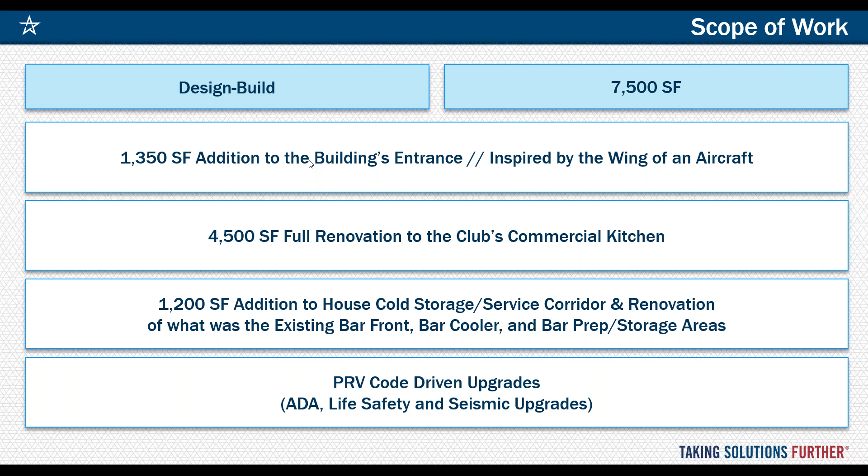updates to the facility, and some of those code requirements were ADA or ABA, and then life safety, which comprised of fire protection systems. That was an all new fire protection system, and then replace in kind with all new updated fire alarm systems, and then also seismic upgrades. So being that this is in San Diego, we obviously have some seismic concerns and had to upgrade those. So we can go on to the next slide here.

All right. So real quick, the overall floor plan, as you see in the top center, there's the shaded area, which is the existing areas that were to remain essentially as not part of the original scope of work. To the far right on the plan is the bar that we also had to renovate as part of the scope, where we had the beer cooler and those things added. To the bottom left is where the new entrance corridor, pre-function corridor, added to the exterior of the building. And to the left of that, off this graphic, is where the main parking area is for the existing site. And then in the bottom center is the large 4,500 square foot kitchen area.

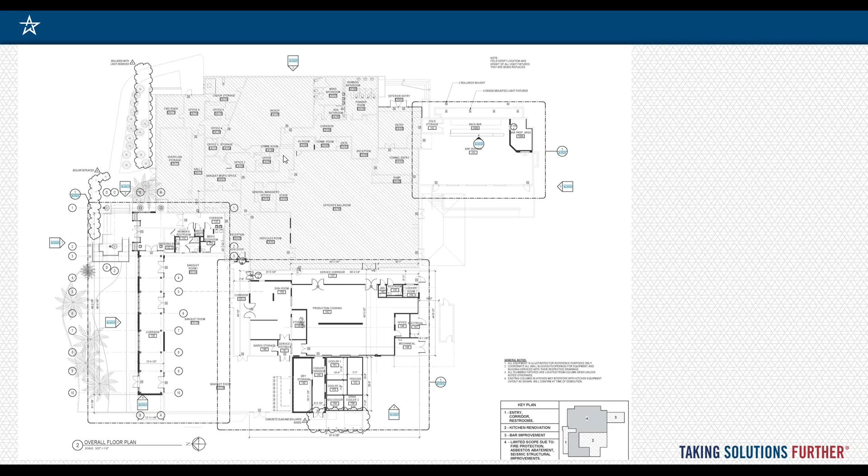What's important in the plan is, in order to accomplish the expansions or additions to the facility, as part of that analysis, we had to look at the allowable areas within the unsprinklered components. And over time, there had been fire party walls that separated the kitchen area from the large banquet halls, but those walls had been compromised over time. And we had two options. One was to essentially redo and create a compartmentalization in plan to avoid major sprinkler upgrades, or the second was to do a whole sprinkler upgrade to bring the facility into current compliance, and that was the decision that was made. Okay, next slide.

All right, so speaking of the PRV, the plant replacement value code-driven updates, I spoke on the seismic and just kind of wanted to go into a little bit of depth of what that entailed. So we knew going in that we were going to have to do all this, and we actually partnered up with a local seismic engineer who worked directly underneath the engineer of record. Again, Stellar's a design build firm, so, having had this project in San Diego, we sometimes will obtain consultant services through local entities to perform scopes of this nature.

So as far as the seismic upgrades, there were strategic areas throughout the facility that were deemed necessary to saw cut and remove slabs. You can see on the right, that's an interior corridor where we removed the slabs, excavated down, and then there was specific details where we would add additional rebar reinforcement doweled into the existing foundation. And in essence, what you're doing is you're widening the foundation and ultimately resisting, I guess, turnover could be the term we use here. But so it was that, and then also the exterior where we had to excavate down and do the same thing, just widen the girth of the foundations there. So next slide, please.

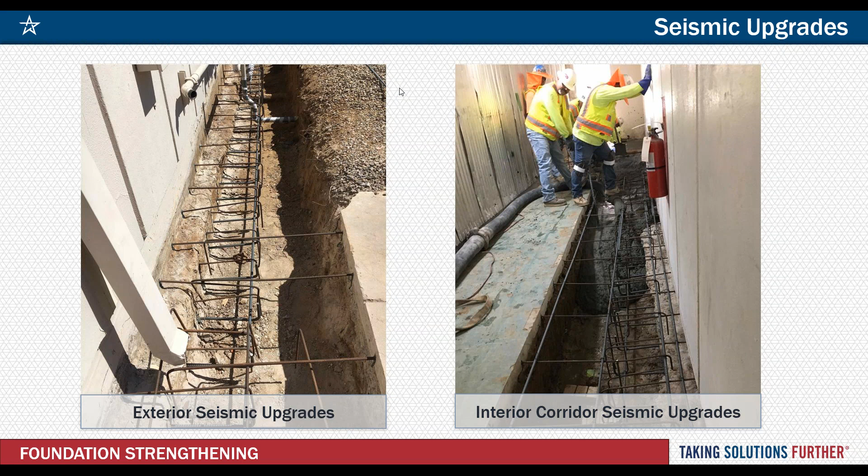Okay, so we had foundation strengthening. We also had shear panel reinforcement. So again, in strategic areas around the building, we had to demo out, and you'll see the picture on the left where we're demoing out the existing plaster. And then we went back with 1/2-inch CDX plywood, which spanned the entire face of different areas. And then subsequently we went back and put new stucco over the exterior facade. So next slide.

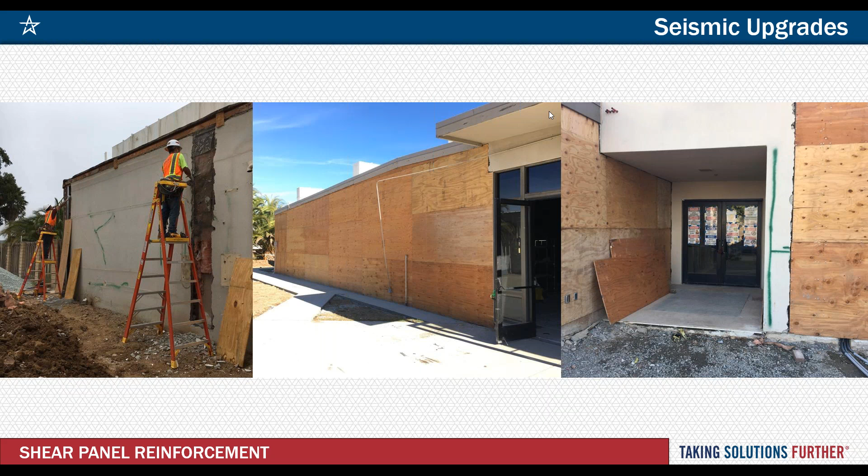So just more pictures of the same and just kind of the process. You can see the layout there where we're getting ready to stucco. And this is Tony. On the far left picture, you see columns placed in front of the wood paneling. The wood paneling is the existing exterior. You see the dark areas. Those were the entrances from the outside into the ballroom spaces.

They have one large room area which could be subdivided into 3 rooms, and so that's why there are the number of entrances. And part of the scope, once again, was to create an interior corridor so they could access those rooms not from outside under weather concerns, but from an interior connection point. And you see the columns had to be built independent from the existing structure to avoid any of the structural issues. That's the expansion area. Correct. Yeah. Okay, next slide.

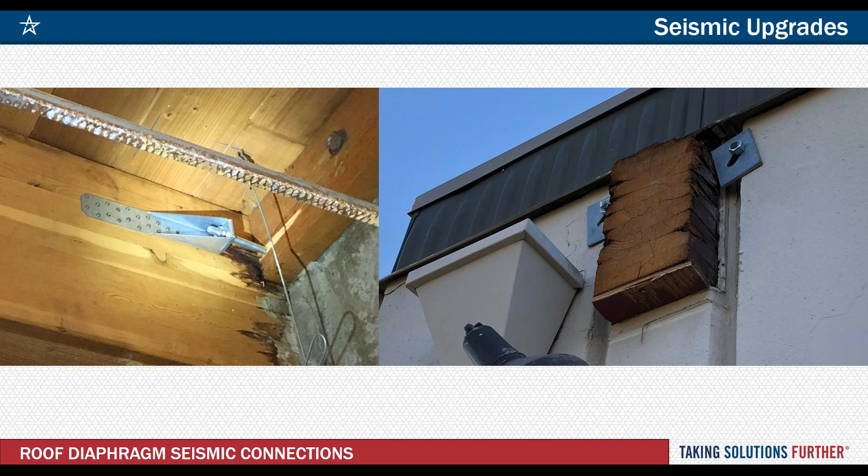Okay, so we talked about the foundation strengthening. We talked about the shear panel wall reinforcement. So then there were also concerns of the roof diaphragm and the necessary reinforcement there. And so what you're looking at here is there are structural wood beams all around the perimeter of the facility, where the ends of the beams protrude through the exterior wall. And so that occurred all around the perimeter of the facility.

So one of the details was to drill and attach anchors and hold downs through the wall into the existing beams. And so the intent was to secure those in place in the event of a seismic event or earthquake, to prevent those beams from shaking off the top of that wall. And then subsequently you'll see some pictures as well, but we had an architectural cap that covered the ends of these beams as well as the washers you see there. So next slide.

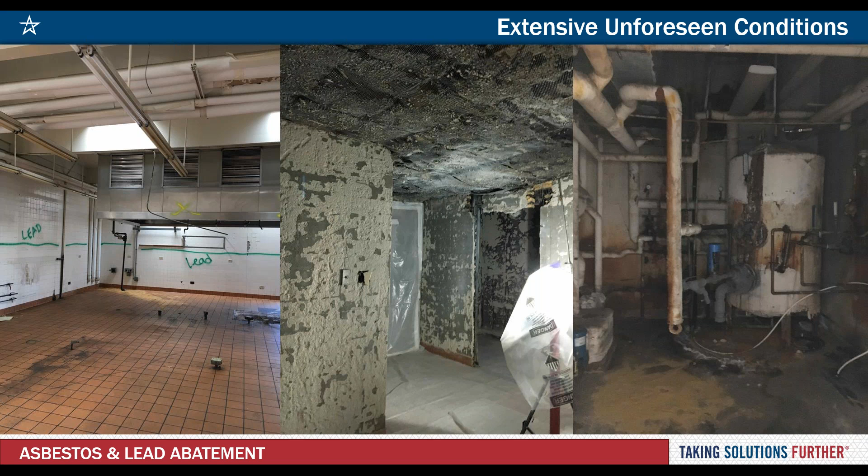Okay, so going into this project, we knew that there were hazardous materials. The facility was constructed, like they said, back in the late 50s. And so we had onboarded an asbestos survey consultant and had them go out and they identified all the different materials that were considered hot. So we had asbestos, there was lead, we found some areas with some mold, and so through the natural course of abatement, we prepped all the areas and abated everything so we could go back with the new materials.

So what you see on the left, that's the kitchen space. And you see all the walls are lead. The picture in the middle is just some of the corridors leading up to the kitchen. And then the far right picture is like something you see out of a horror movie. It's the boiler room, and of course all the insulation and everything leading up to it had hazardous materials. And I guess this is a result of a building that's 60 years old that had a number of renovations and additions that weren't very well documented. Correct, yeah. So there were some obvious challenges that came from that, and we'll cover some of those in additional unforeseen conditions. So, all right, next slide, please.

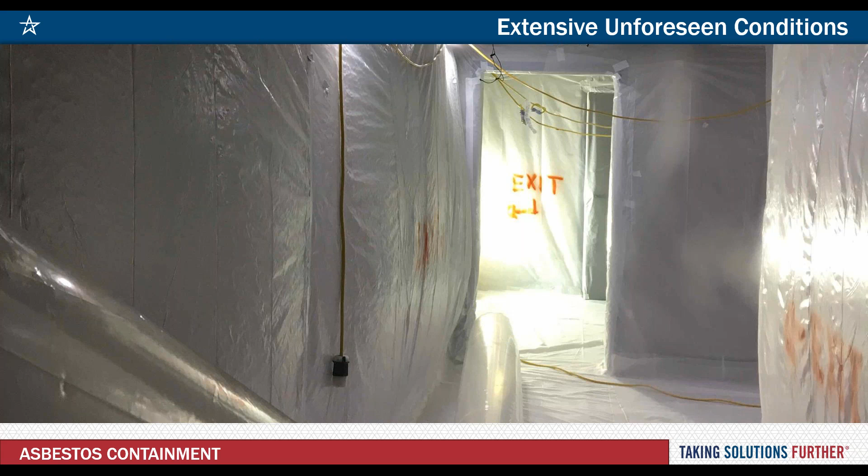So yeah, just some additional pictures of the abatement process. Of course, everything's plasticed off, and we have air scrubbers and just the natural process of abatement. So it was all, I guess, what was the word I was looking for? Sorry. But yeah, that's the process. We can move on to the next slide.

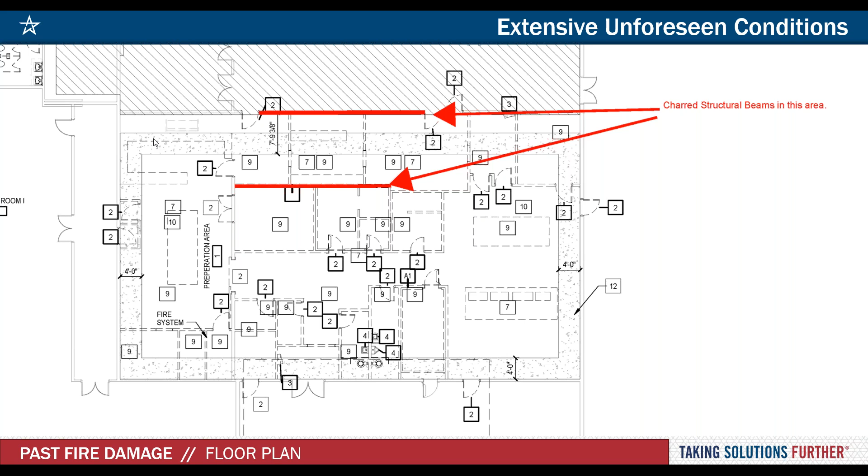And then you see a whole other entire main that would be running out towards the north of the facility. And I'll show you a civil plan so it makes a little more sense where it was going. And we were going to put a new grease interceptor there. You can go to the next slide. And again, this is the original design. So this is the floor plan you just saw. Again, the mains going out to the existing grease interceptor, and then also the new one on the left. Okay, next slide.

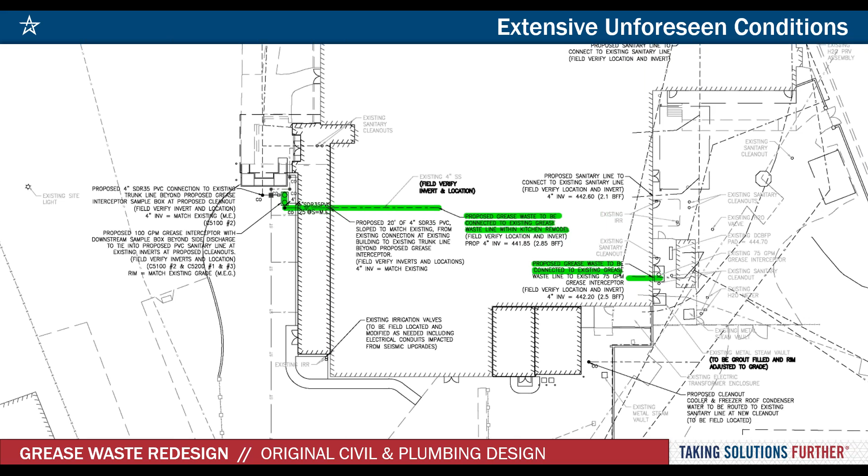Okay, so the challenges that we underwent in the process of tearing out all the slabs in the kitchen for all new MEP or new plumbing infrastructure to support the kitchen renovation, we started to look at the existing grease waste piping, and we had some kind of foreshadowing of these issues in that when we talked to the end user, they had a significant amount of backups over the years, and we started to understand why that was happening.

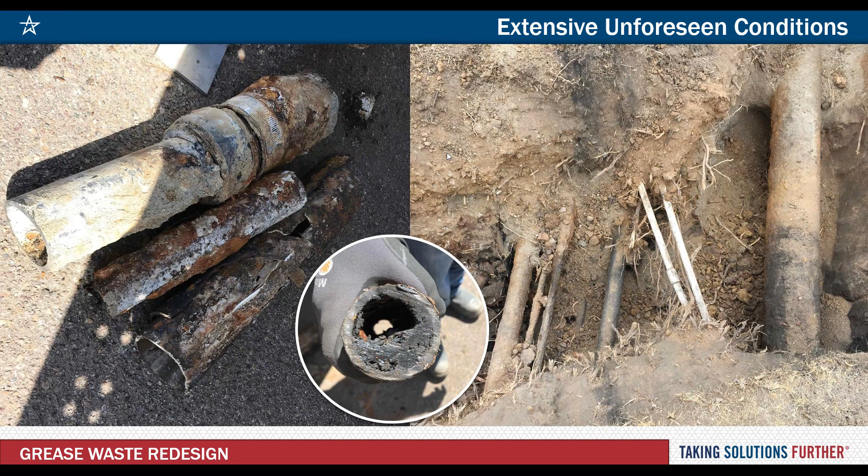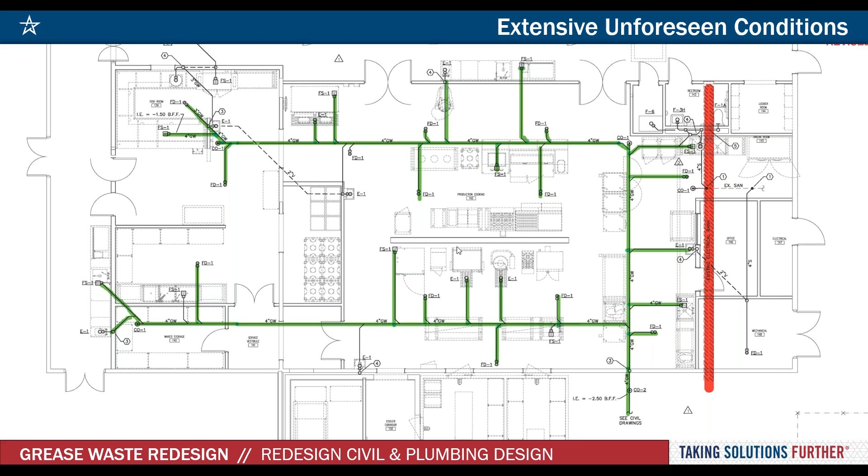So what we ended up doing is we determined that instead of having two separate branches or two separate grease waste mains, we would combine it into one system and then increase the size of our grease interceptor and just run it out towards, I guess, plan south here. So we'll show you on the subsequent page, which is the civil drawing. Go ahead, next slide.

So fortunately, everything worked out, but there was a significant amount of input we needed from the field and also from the design team to figure out a solution that worked and could maintain schedule. So there were some significant challenges there that we overcame and had to expedite those efforts to keep from impacting the project. So next slide.

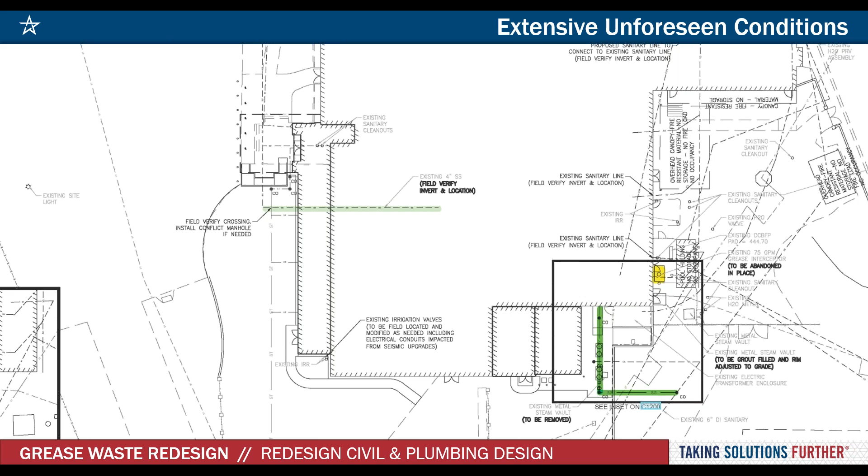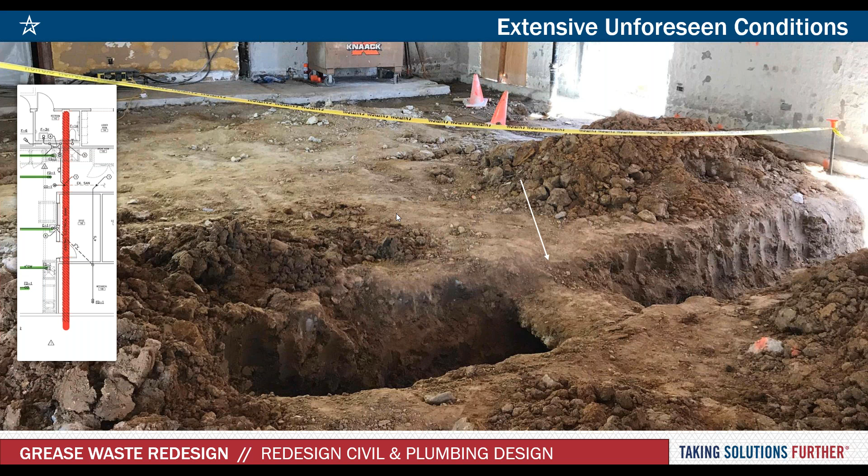Okay, so among other unforeseen issues or conditions, of course, with a full-on renovation of the kitchen space, when we started demoing out walls, and again, this is kind of the theme here, is just lack of documentation going into this. We plan based on what we know. And then once we start tearing out walls and new conditions present themselves, we just have to adjust and move forward with it.

So in this case, we tore some walls out and found some downspout or some roof drain leaders terminating in a cavity where, with a new floor plan, that was going to be problematic. So it forced us to have to reroute a lot of the stuff into new walls or new cavities, or rework the underground to accommodate our new floor plan.

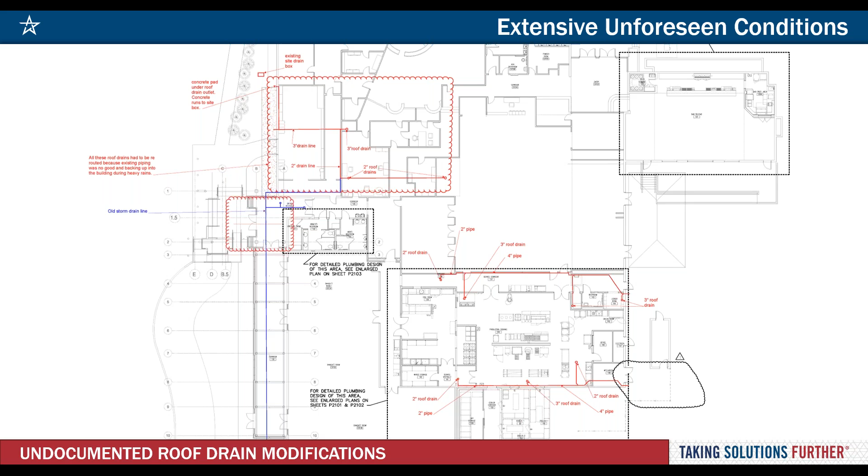So all the stuff in red are all the roof drain modifications we had to make. And some of the stuff on the top left we'll speak to a little bit more, but had to rework due to some drainage challenges experienced at the front or the north canopy entrance. So next slide. And here's just some pictures to kind of show you guys some of the roof leaders we had to reroute. So, all right, next slide.

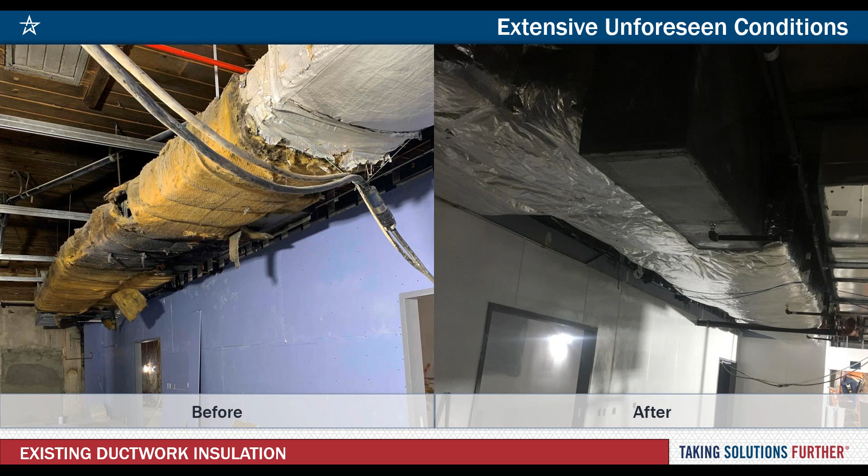Okay, so when ceilings started to get demoed out, it revealed a lot of the ductwork that had just failing insulation on it, just years and years of dilapidation. And so the owner had requested that we replace insulation in a variety of areas, and so this is kind of a before and after, just general maintenance that needed to happen to these elements. Definitely improvement. Yep. The next slide.

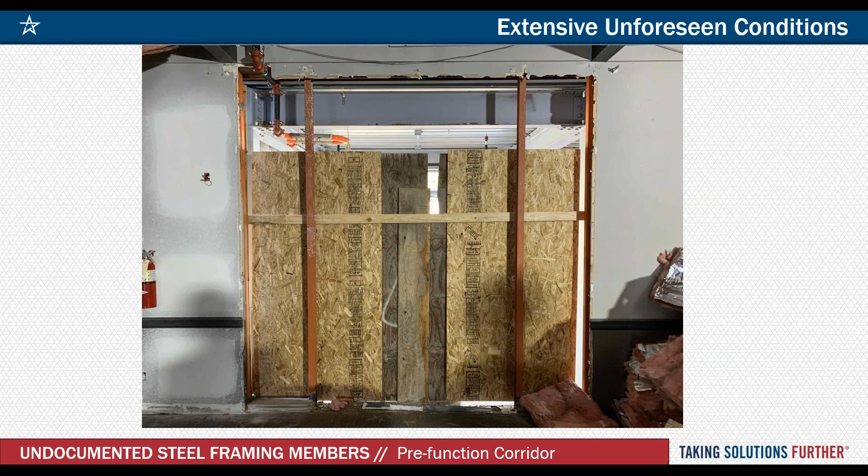Okay, so what you're looking at here is you're standing inside the banquet hall and you're looking out towards what will be the pre-function corridor. And so the intent here was that we were going to basically put in new storefronts in these locations. And again, on the as-builts that we were provided, there was no indication that there were framing members where these storefronts were supposed to go.

So naturally, we had to get our structural team and confirm what needed to be done. And so ultimately, we ended up reframing that opening to accommodate the new storefronts, and those framing members were subsequently removed. So, all right, next slide.

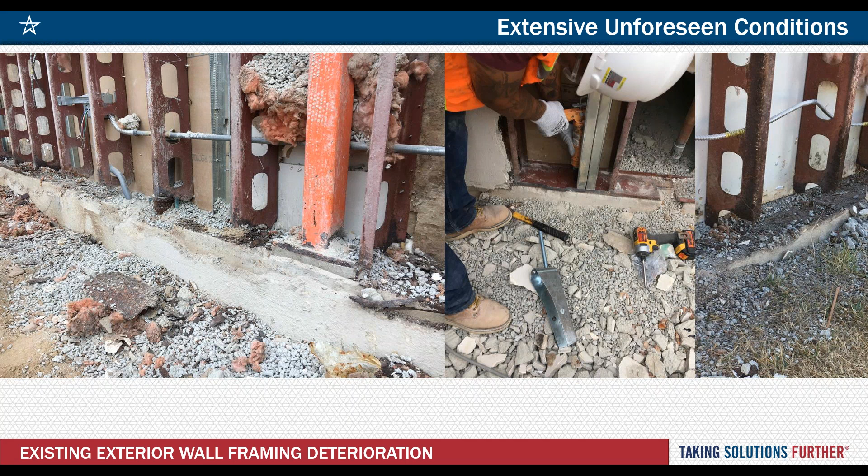Okay, so as part of the seismic upgrades, we started to encounter all kinds of stuff in the wall cavities. This is an exterior wall, and this is all metal framing that you're seeing here. And I'm trying to speak to the flashing issues that we observed. Or lack thereof, right? So when we opened up the walls, a vast majority of these exterior load-bearing members had probably the lower 6 to 8 inches of it just totally gone. It was rusted out over the years. And so naturally, there's some serious concerns with that being a load-bearing wall.

So we consulted our structural team, and what we ended up doing, you can see that middle picture, they're sistering some metal stud framing and attaching some hold downs into the slab to support those areas. And that occurred definitely in areas we were working in, but I'm sure in areas that were not a part of our scope, those conditions exist as well.

And I think it's important to, once again, elaborate on proper detailing in general of exterior walls. You would think of California, very low wet bulb condition, very dry climate, not that much rain. But yet, how grade meets an exterior wall, it's important to have proper offsets, proper flashing detailing at the base cap, all of those kind of details and conditions really matter. Maybe not day one, but over time, obviously. And this is a great example that shows what can happen even in as nice a climate as Southern California. Next slide.